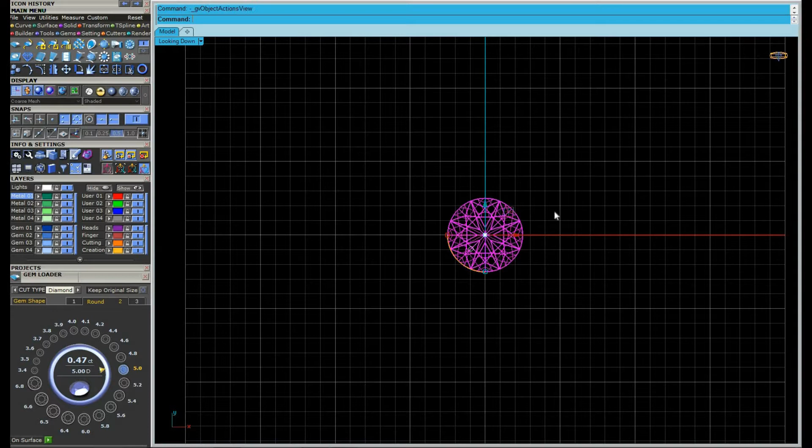Okay, so first of all, let's start with a gem. We are gonna take around the size of 5 mm. Now we are gonna take the gem profile to make some curves around it and make the offset curve of the shape.

So first of all, we are gonna make the curve. We have got the curve. Now we are gonna patch it, and then we are going to trim the surface from the center.

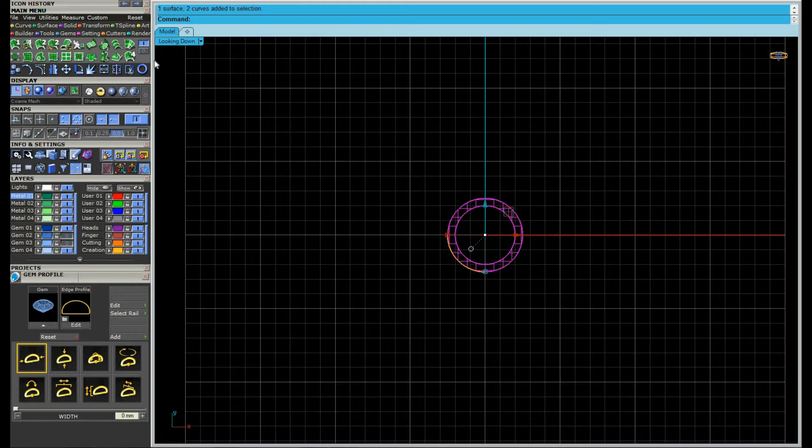Now what we are gonna do is we have to take an offset curve to make the shape, or you can say we have to make a solid surface. We are gonna flip the arrows upward, we need it on the upper side.

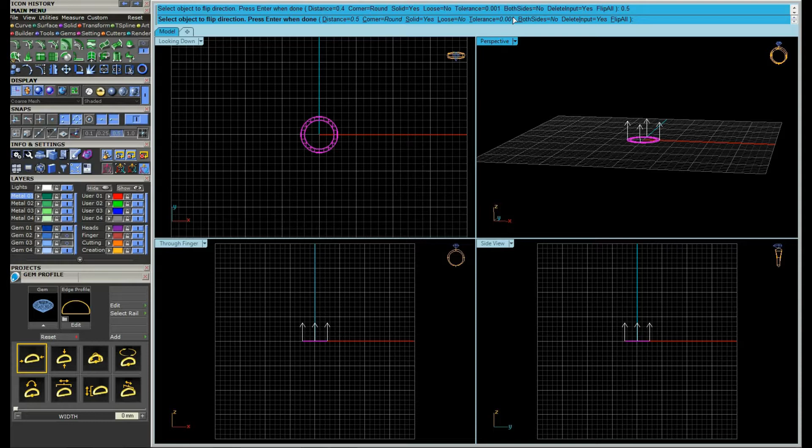Then the gauge that we are gonna make is 0.5 mm. It depends how much weight of a ring you want. So I have to make a lightweight ring, that's why I'm taking 0.5. You can take even 1 mm.

Now we are going to make the cylinders.

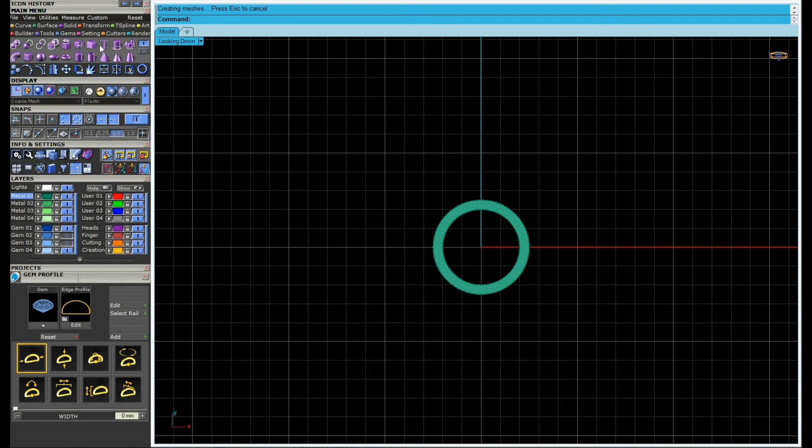Okay, let's come to the point now. We are going to make the cylinder. Cylinder, basically, is an area which can cover the gem, so the gem doesn't go away.

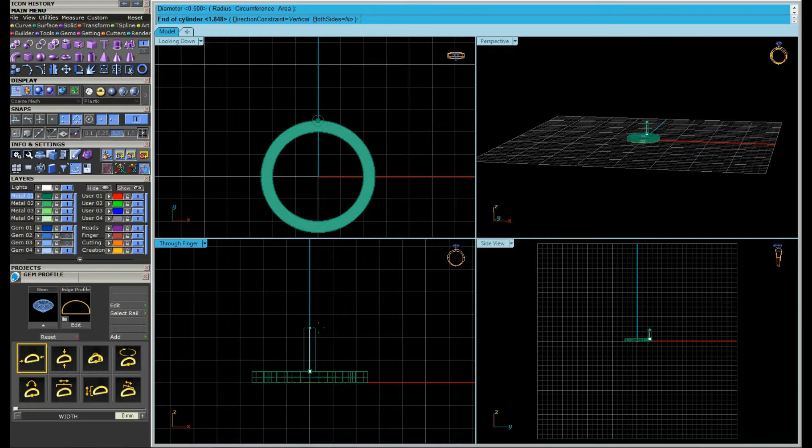It will be cut after the design is completed. We will take it about 0.5 mm, and the length will be, you can see that it's 1 mm. From the through finger area you can see that it's 1 mm, one box is 1 mm.

Now we are making fillet edges.

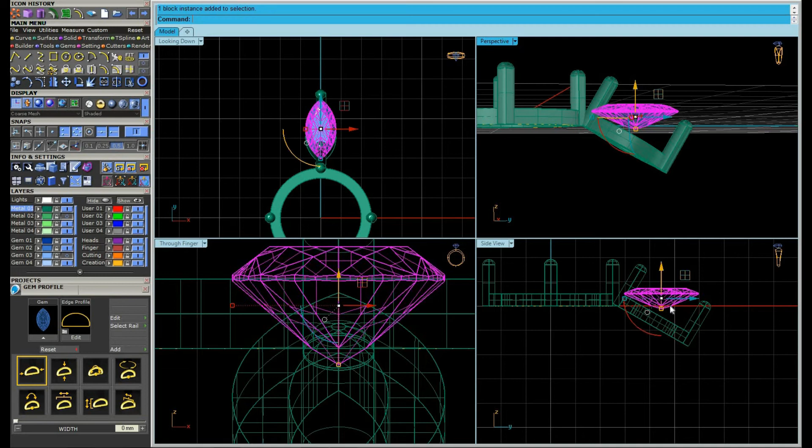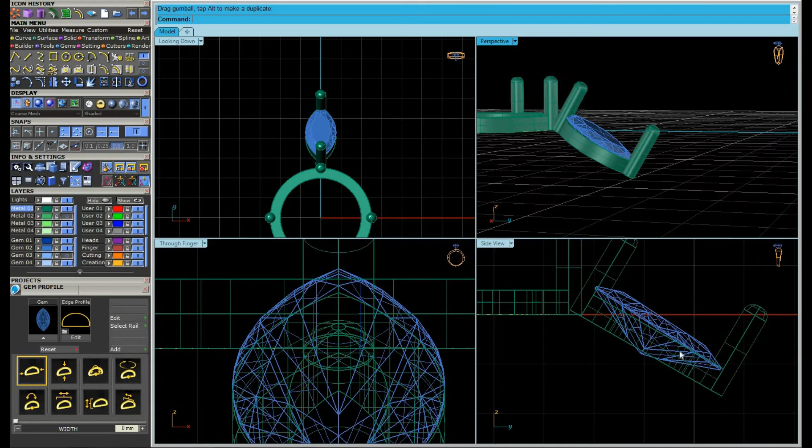Now what we are gonna do is, as earlier I told you, the gem also needs to be rotated. Now we are rotating the gem just in the perfect way as required. It should be absolutely perfect. Okay, I think that's good.

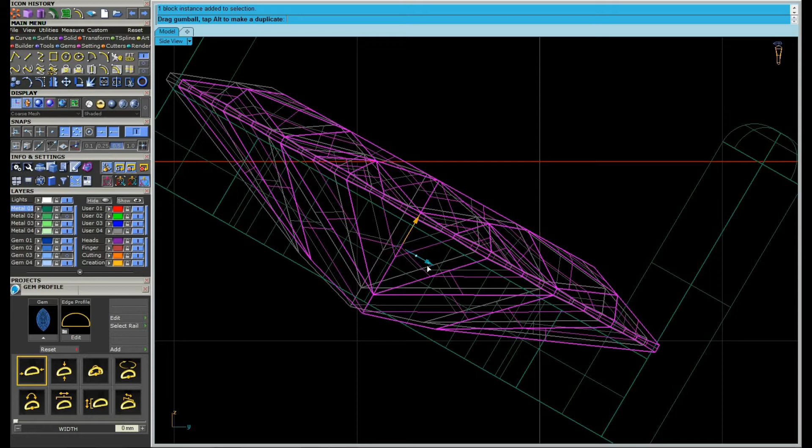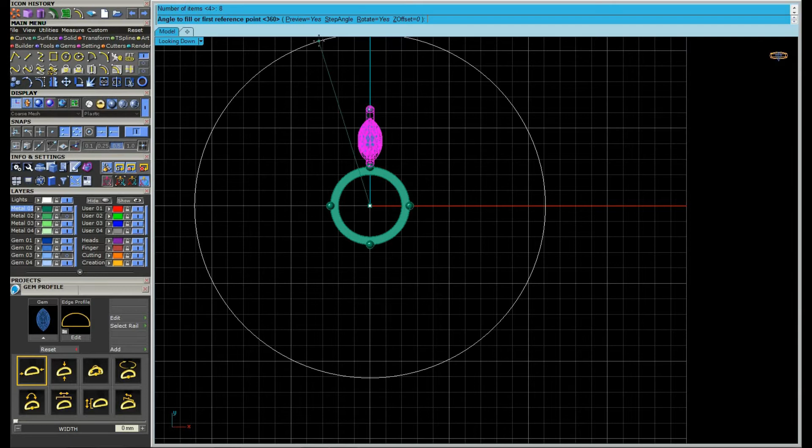Alright, now as you can see it's absolutely clear. So now first of all, open the looking down tab. Now the command of array polar comes up again, pressing F4 as I told you, it comes in the center. Items should be like 16. Let's try 16, that's good. Sounds good to me, okay then.

So now guys, you can see that our surface is made up. Our front area, which is the most important part of our ring, is completed. You can see that all the surfaces are connected with each other.

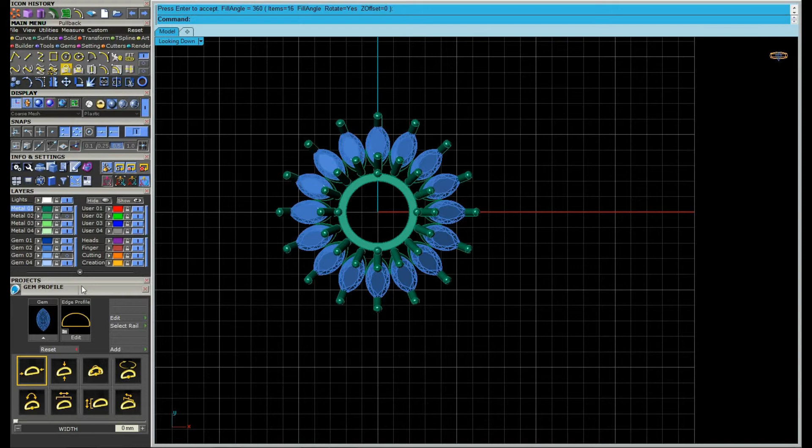Now what? Now we are going to make the downside area of the ring, which will hold all these gems and the center diamond, including the cylinders of the ring. I think we should first close the history. Closing the history will allow us to create a better circle for the downward area.

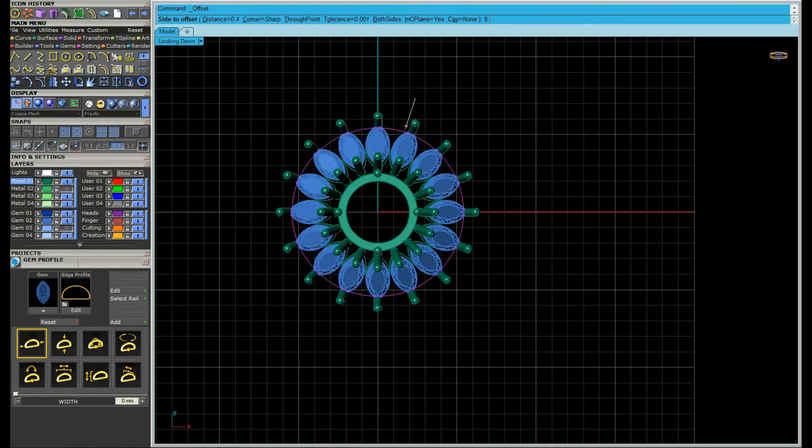Okay then, now we are gonna take the offset curve. Offset curve will be 0.4. Left click, that's good. Now we're gonna select it, pressing shift, patch it again. Trim center area, that's good.

Then now we're gonna give it an offset surface. It will be around 0.5. That's good, 0.5 mm is good.

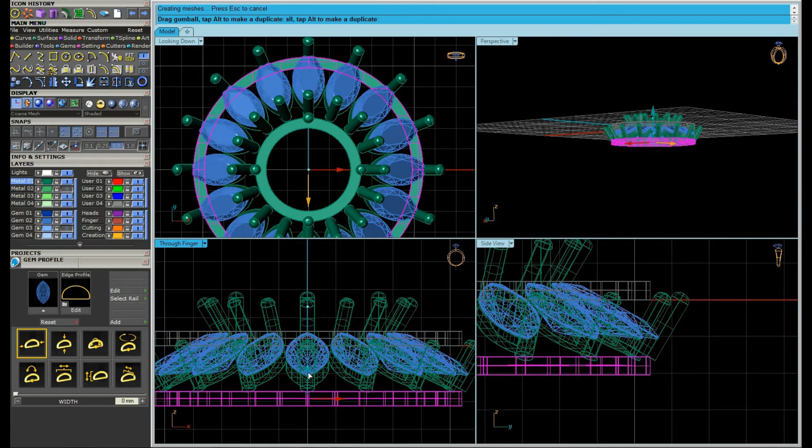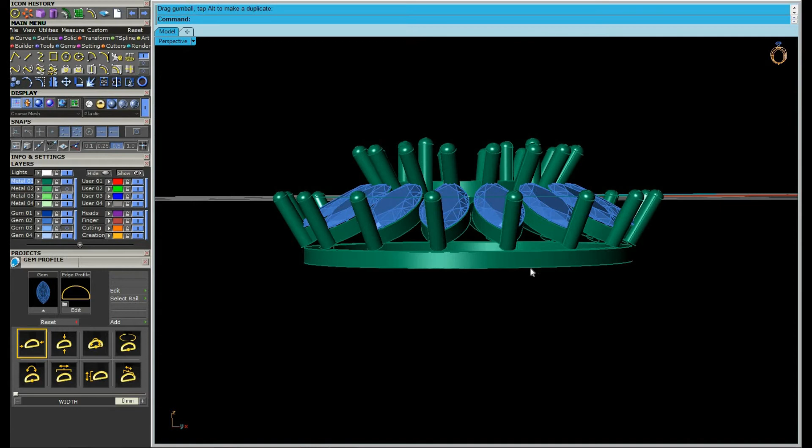Through the finger area, making it just in the center, so that the cylinder, outside area of the cylinder, joins up with the downside area. It's basically this circle surface we have made. It is a point where all these gems and the center diamond are attached and connected, and it will hold this. The through finger area just a little bit up so that it connects perfectly.

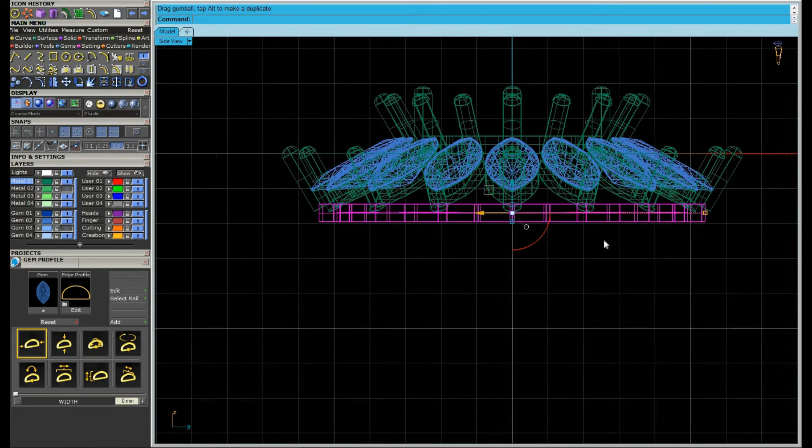This, so you can see that side is not covered. We are gonna make it just a bit bigger, so all these circle sides of it are covered. Now go through the side view, and you can see from this angle it's also a bit smaller. We're gonna make it big like this.

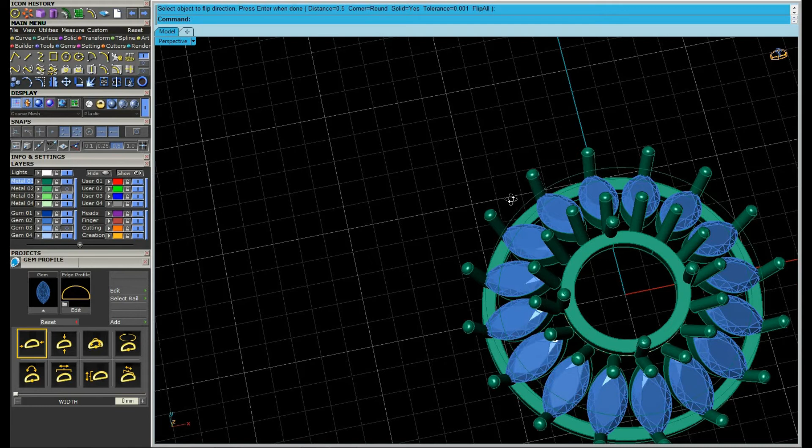Now you can see that all the cylinders are connected with the downward circle surface. So guys, front side is almost done and completed. Now what we're gonna do is again select these curves and hide them.

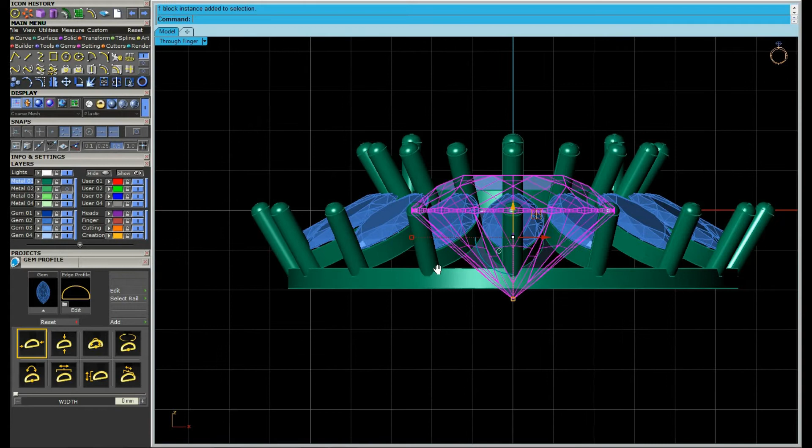Okay, then now we will take this gem upside and set it just on the perfect angle. That's good, I think it should be a bit down, a little bit more. That's good, perfect.

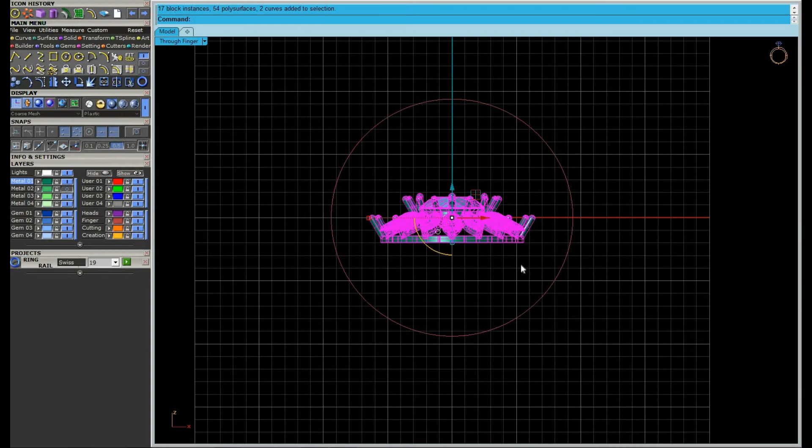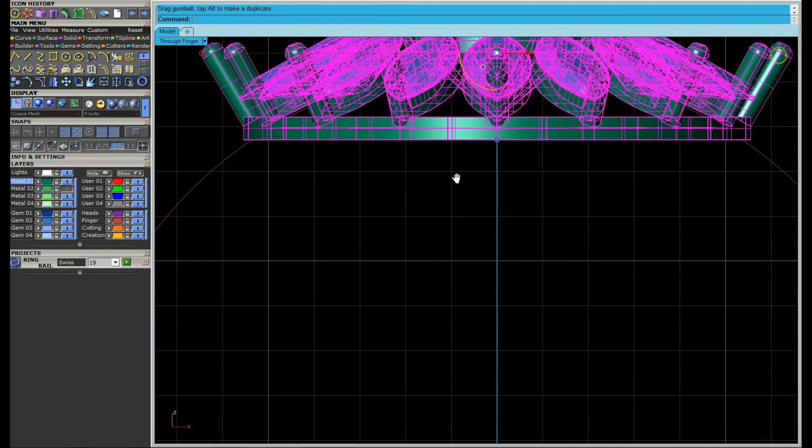Okay, now I have created a ring circle around 19 Swiss size, which is default size. You can say that mostly it is used. We are just setting the stone and the surfaces on the surface area where the curves and the gem profile will be taken again. Now just wait, it's called profile placer.

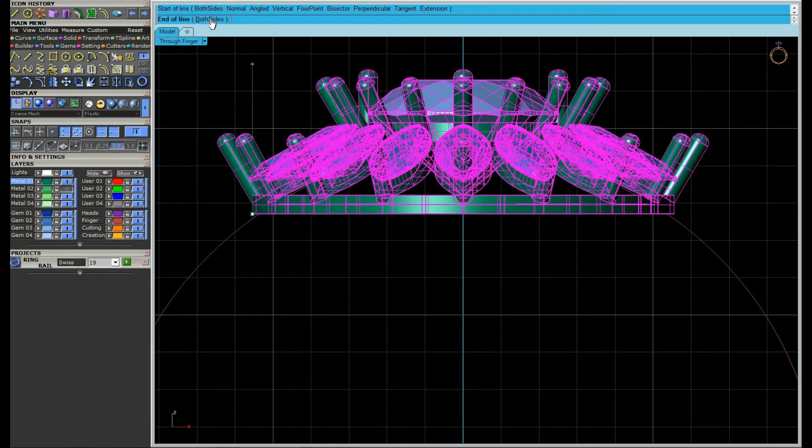So guys, basically this line that I am drawing is, it will be both sides, because now what we have to do is to trim the circle from the center, because the ring that we are making now, it should be from the line and the end point. Center will be trimmed. Just wait and watch how it's gonna be done.

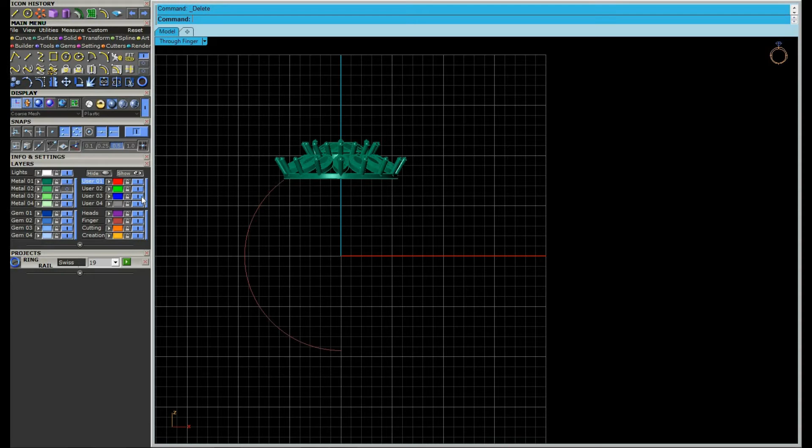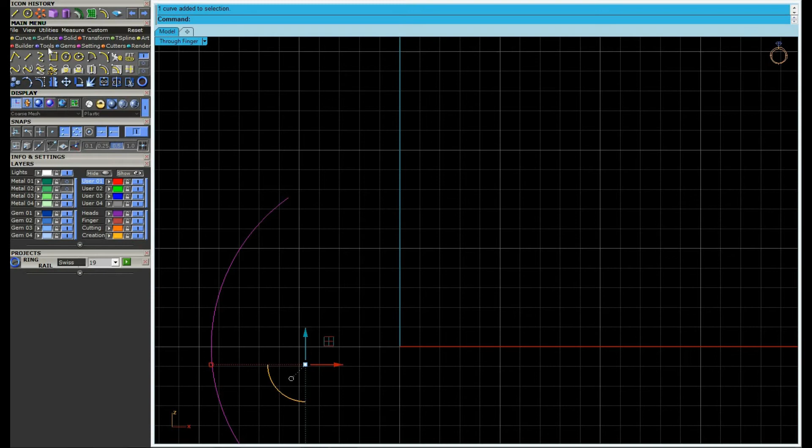Okay, center will be trimmed. Just wait and watch how it's gonna be done. As you can see now that we have made a curve which is required for the ring. Now what we are gonna make it, we are going to make a profile placer. This is where it all comes up. The curve will go there, and you can see that we have got a shape like editing area, which we are gonna make it.

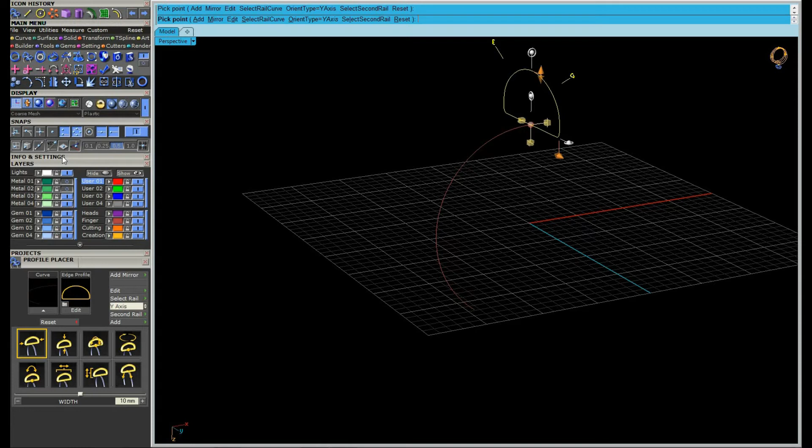So guys, now first of all we have to take a shape for the ring. Handle of the ring shape, shank profile. You can see that all the shapes will come up here. Make it a bigger size right now. Okay, that's good.

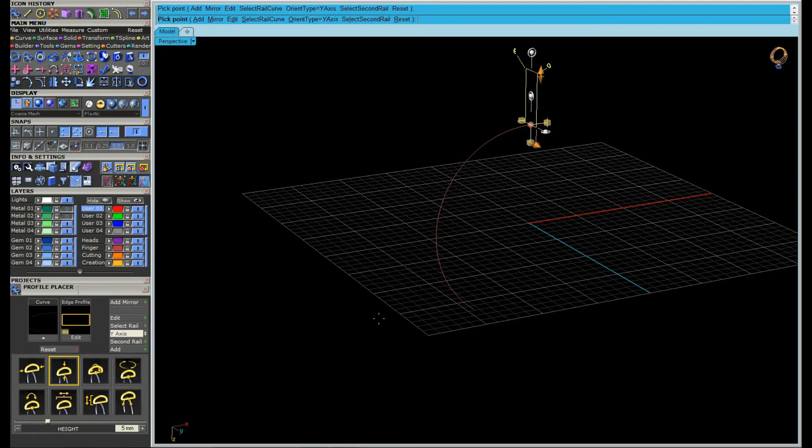So basically I always choose this shape, box shape, and it is the one that is used normally. Width I have decided 2 mm, and height you can see it from here.

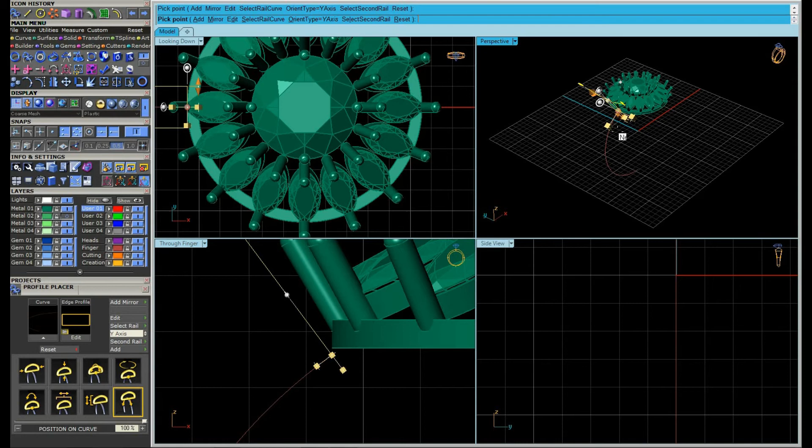Now you have to select this from the mid circle position on curve, and we are going to make it just at the top 100%. Now we will decide the height. I have made it on the top, so just to decide the height, what height I am gonna take of the ring. Right now it's quite a huge size, so now we are going to make it small.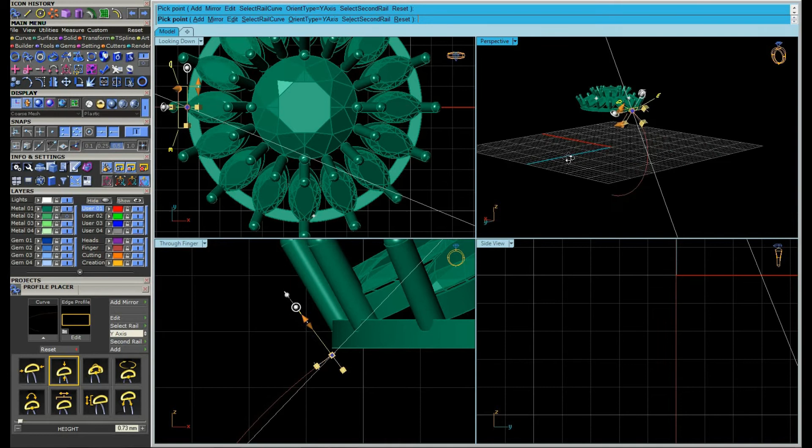From this area, that's better, that's better. Little bit more. Okay, that's good. That's absolutely fine. 0.73 mm is the height.

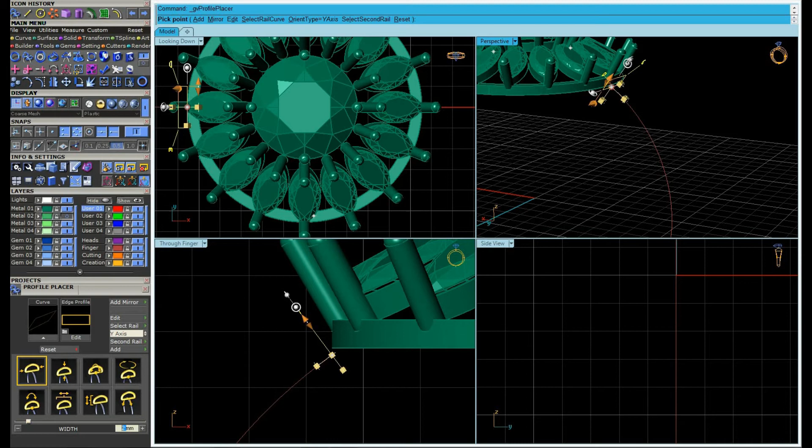Right, now we are going to click right click, and the curve of the upper side is done. Again we are going to select the curve first of all, and that's good, I think that's good, that's fine.

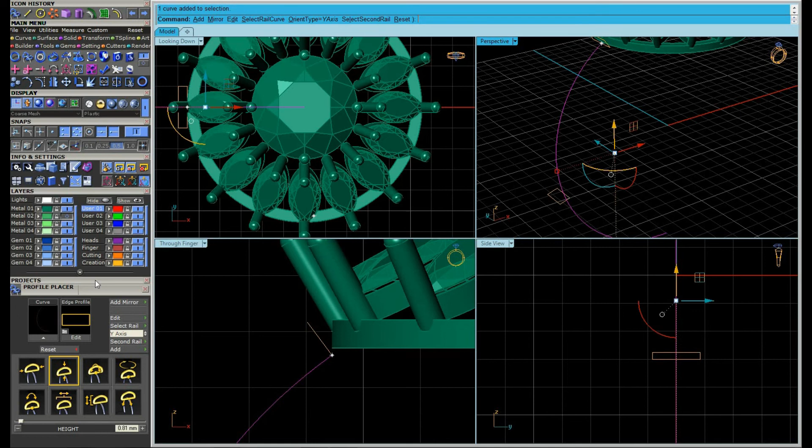Now we are going to select the curve, and now it's the time that we go around the midpoint area. Midpoint area is where the shape we will change just a little bit of the shape. You can see that I am decreasing the width on the above front side. It was 2 mm, now I have done it 1.5 mm, and the height is 0.81 mm, just to make it little good. From starting to ending it will close a bit.

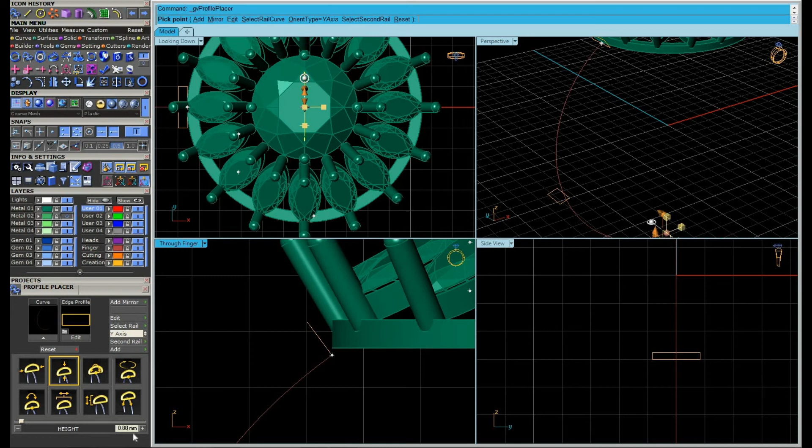Okay, that's completed. Now just the end side is remaining. Width less than a bit of 1 mm, height 0.88 mm. That's completed.

Now we're going to press the right click. So you can see that the shape of the ring side handle is completed. Now it's a special command that we're gonna use. We call it sweep one command. In the surface area we will find it. We are going to the surface area.

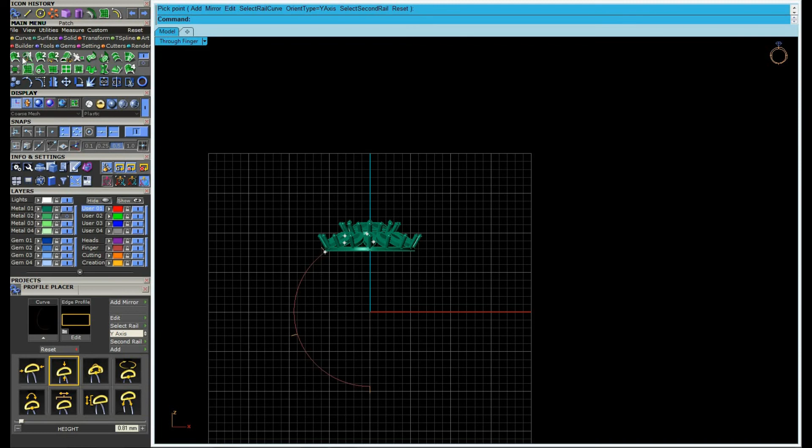Surface area. Then we are going to use sweep one command on the work side. First of all, we will select the first ring rail. Then we will select the cross section curves 2 and 3. Then right click, and now going to the perspective angle, you can see that all the arrows are on the equal sides. Right click. So yes, we have got the shape, our shape.

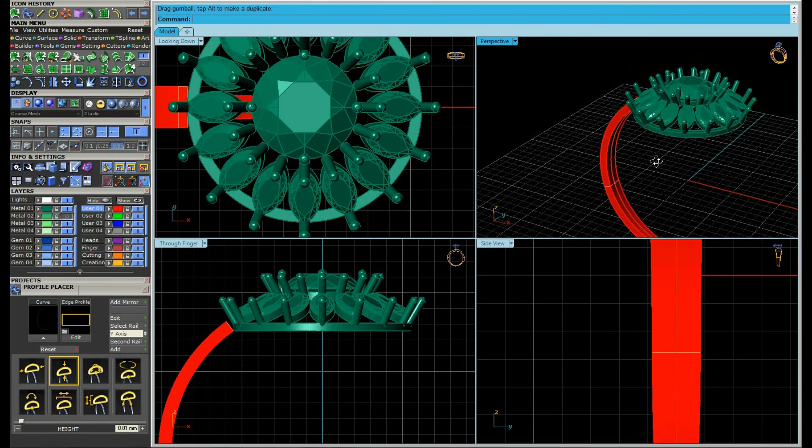You can see that almost our work is almost completed. We have got a ring rail. Center is connected with the ring rail. I think just a bit is missing. So what we're gonna do is highlight all this and make it a bit downward. So basically guys, this is the design that we were required to make.

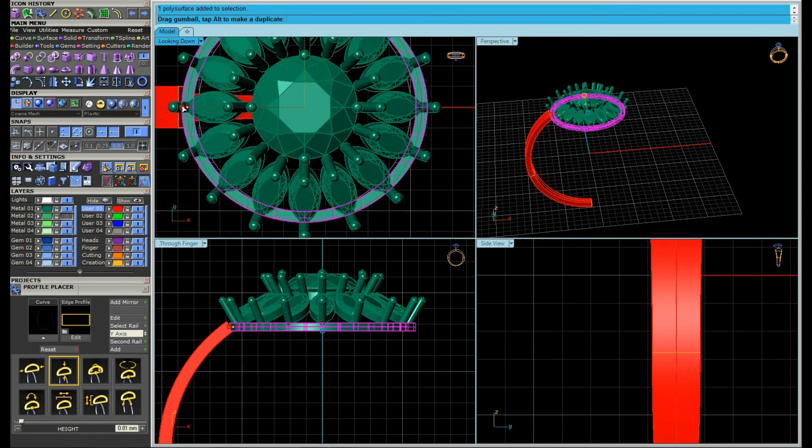You can see that it's empty from the inside and it won't work. So now what we're gonna do is just go to the solid cap planar, and you can see that now it's solid from the inside also. It's almost done. Now what we're gonna do is just a bit bigger so that it's connected with the ring rail.

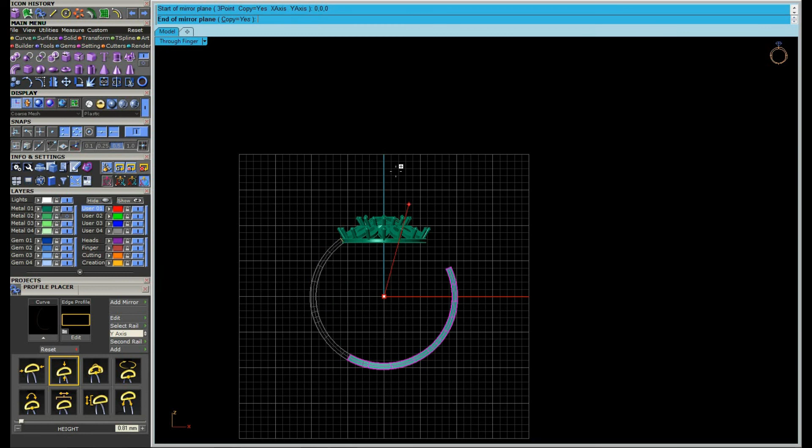Okay, now I think we should mirror the ring rail on the other side also, so that it's completed. We will go on the Through Finger area, highlight it with the green color, and then mirror it, pressing the F4 command to pick it from the center. That's it.

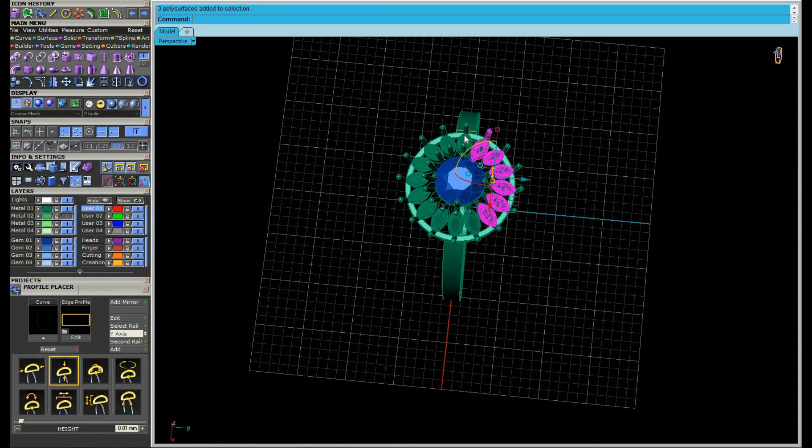You can see that all the sides are covered up and the ring is perfectly poised up and ready. Okay, you can see all the side angles are completed and covered up. One thing that's missing, that we have also highlighted our gems with green color. It was a mistake, I didn't see it coming up. So what we are gonna do is pressing shift and selecting all the diamonds and making it the color we want.